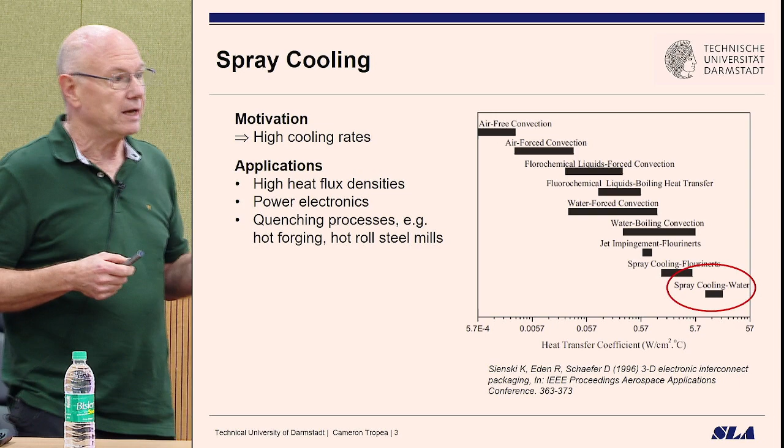This slide you've already seen at least once, maybe twice today, and it simply says that spray cooling, in this case with water, gives you extremely high heat flux densities - higher than anything else. I didn't put temperature on here also.

Now I have to figure out how this works - how do you get the pointer to work in this thing? Ah, okay, I think I have it. I got it, yeah, I understand - I first have to get my cursor off to the other side, then turn on this guy. Okay, good, I got it, yep, thank you.

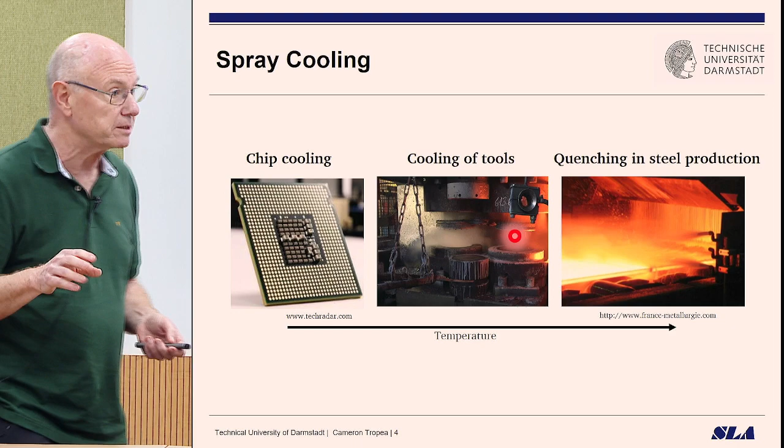So let's go. We have several applications, some you've heard about today: chip cooling, also quenching - hot rolled steel slabs and so on are spray cooled. One which we did a lot of work on is forging, hot forging: forging dies get hot, and you spray cool them in between individual castings. These applications typically involve very high heat flux densities and usually high temperatures. Now I'm going to show you an experiment - not because I want to tell you about what we do in our lab, but because this experiment gives you the information required to understand the physics.

There are two parts to this experiment. If you spray something to cool it, you have to know everything about the spray, and you have to know everything about the slab.

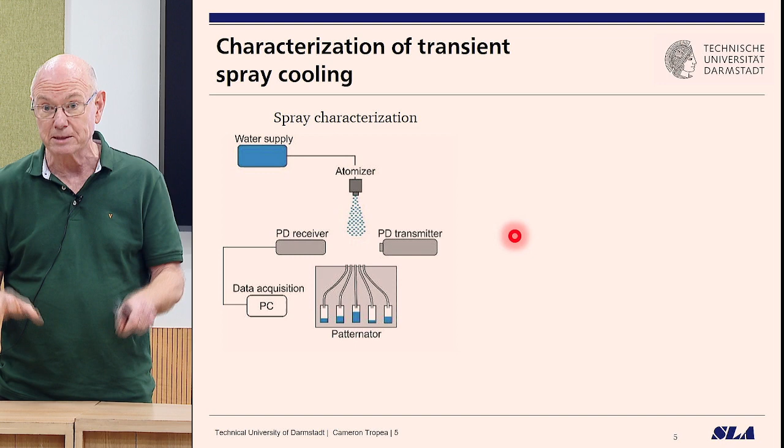So that's why we have two parts here. The first is the spray characterization. You have to know all about the spray, not just how much goes into the nozzle at what pressure. That's uninteresting. What's interesting is how much gets on the substrate: how big are the droplets, how fast are they, what angle do they go at, and what's the number density. Those are the four things you must know if you want to start looking at the physics.

So this is the type of thing you have to have. You have to measure velocity and size of droplets. You have to measure also the mass flux, with a patternator or something. And then that's for that particular nozzle.

Then you have to know something about your slab. If you have a big slab and you've heated it up, typically in the laboratory we make it adiabatic, so all the heat goes in one direction, a one-dimensional heat transfer problem. But you have to know everywhere on the plate what the temperature or heat flux is, not just the integral, because the number of droplets is different everywhere.

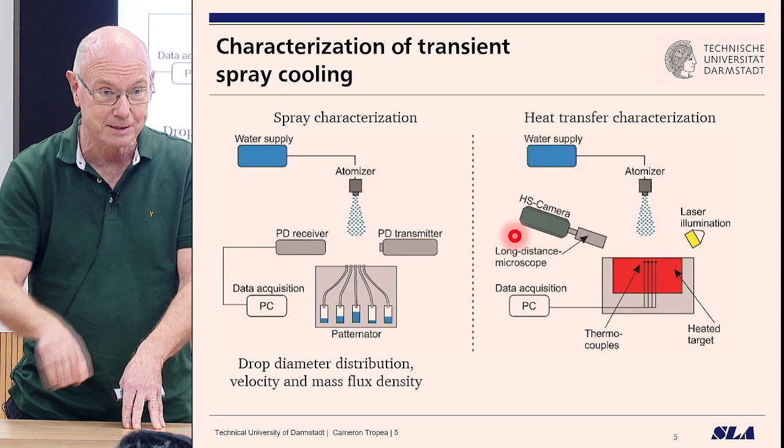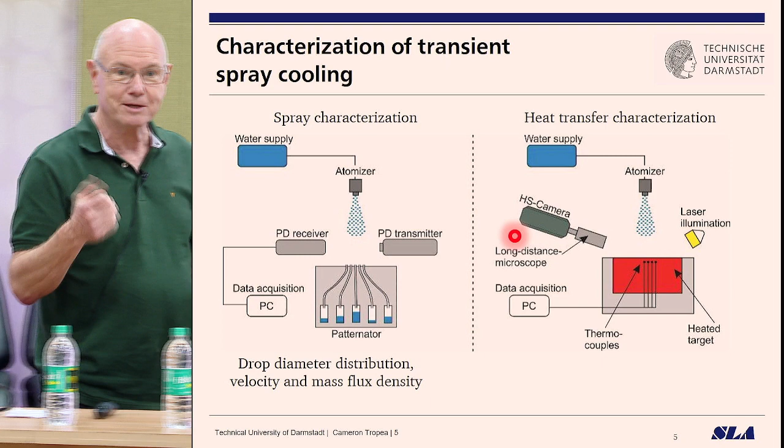So we do that, and then you have all the information to make physics-based models. It's a lot of explanation, but I think you understand what's going on. And if you want to run the experiment, then you have to come.

Now I have to do something. I need the other thing here. Just a minute, sorry about that. I have to take this guy off and put him here. So this is the way the experiment runs.

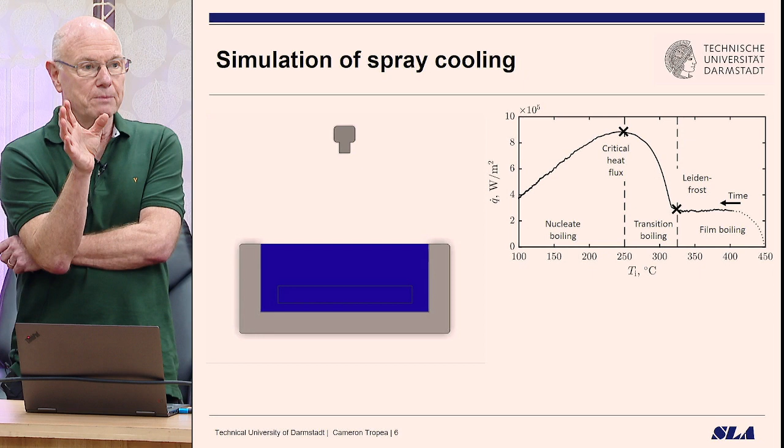You heat up the slab until it's a certain uniform temperature. Once it's uniform, you start the spray, and then you start monitoring where on the slab it's cooling down.

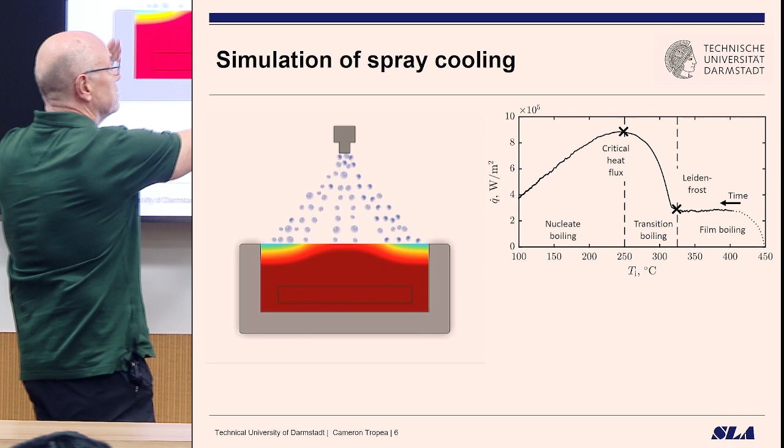Now you need the heat flux on the slab, and you do that with an inverse heat transfer problem. You know the temperature and the boundary conditions, so you solve the FEM for the entire slab and find out what the heat flux is at the surface. That's the inverse problem. But then you know everything, and you also know everything about the spray.

And then you need a fast camera with a big Questar long-distance microscope, so you can see exactly what's happening on the slab. We have to know, is it a pool? Is it single droplets? What's happening? So if we want to make a model, we have to understand that.

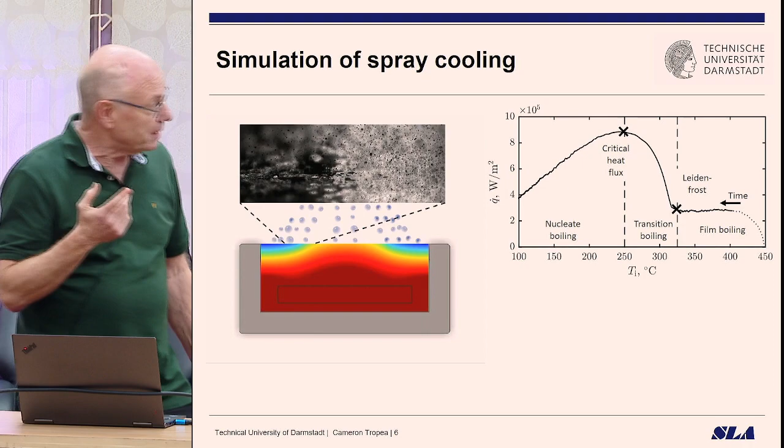This diagram here is a little bit funny. It's the typical boiling diagram. You see the temperature, and this is the heat flux. Time runs here. You start at some hot slab, it doesn't cool down much, and then the heat flux goes up tremendously, and it cools down, and then this is, of course, your critical point.

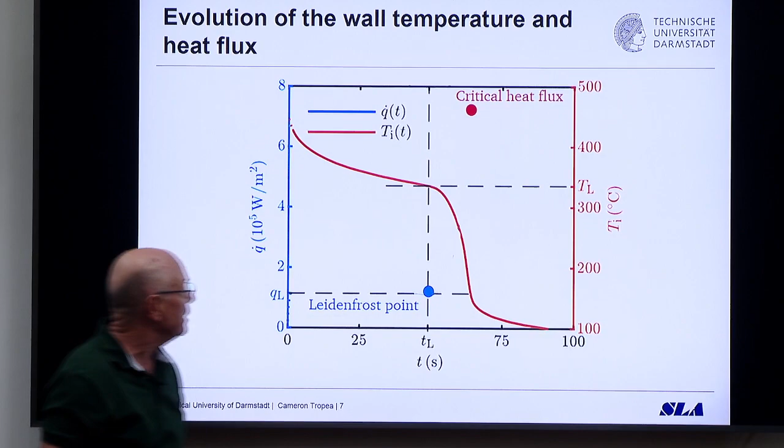I'm going to show that same boiling curve now in another way, in time. Here's the temperature in red. It doesn't cool down much, and suddenly it cools down a lot. And if we look at the heat flux, it's almost very low, and then you get transition boiling. So this is film boiling, transition boiling, and nucleate boiling.

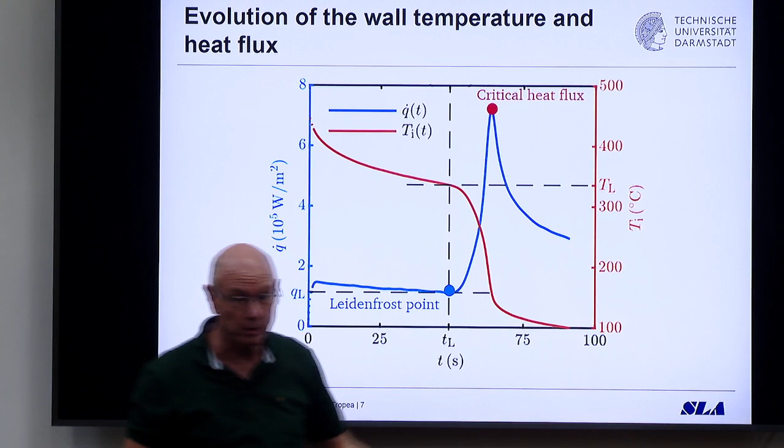So it's clear for the transient problem, we're going through different regions: film, transition, and nucleate boiling. And it's unlikely—somebody said it today, I think our first speaker said it's a dream to get one model that'll do everything. It's not going to happen because the physics are different each time. And the camera will show us what exactly the physics are.

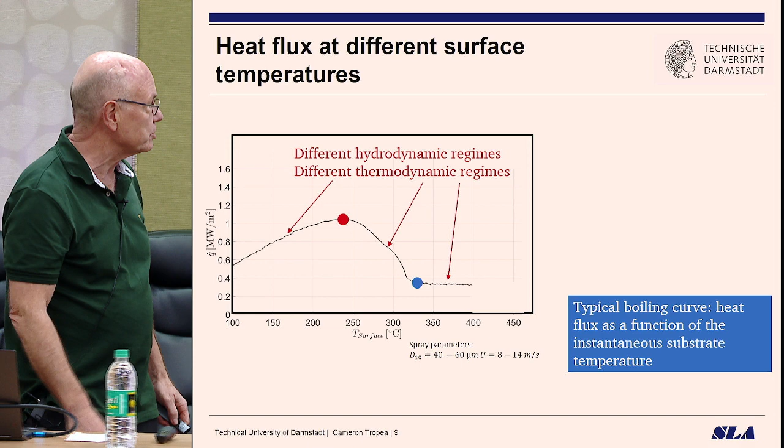So this is a typical boiling curve. Again, I showed in terms of temperature these different thermodynamic regimes. And you can see already here, depending on what temperature we start our slab at, the thing looks different.

Okay, so that tells you immediately there's a memory effect. Somehow the system knows what went on before. The spray doesn't know that, only the slab can know that. So it's very clear the slab and its thermodynamic properties, especially the effusivity, play a tremendous role in spray cooling. And if you don't capture that correctly, you're not going to be able to continue the problem. So that's a very simple deduction out of this picture.

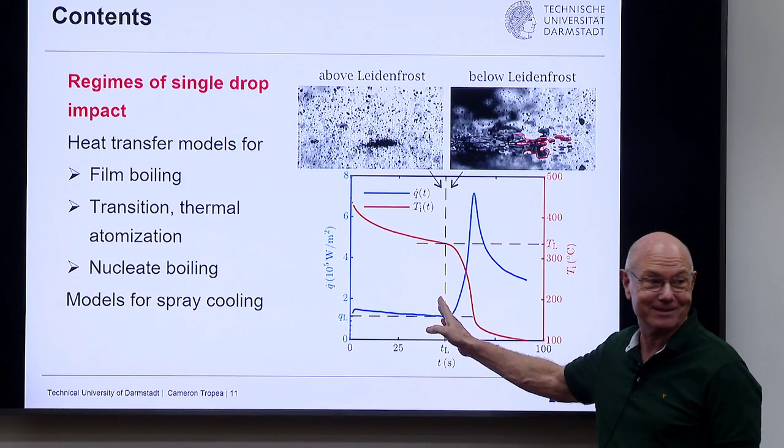Okay, so again, now we start looking at the camera. What's happening in these different regimes? We have this regime here where really nothing happens. The temperature doesn't change much, the heat flux is low, and we don't see any puddles or anything. This is above Leidenfrost, the film boiling. It's like at home in the kitchen on the hot stove, and the drop just bounces off and runs around. So there's a vapor layer there, and very little heat transfer.

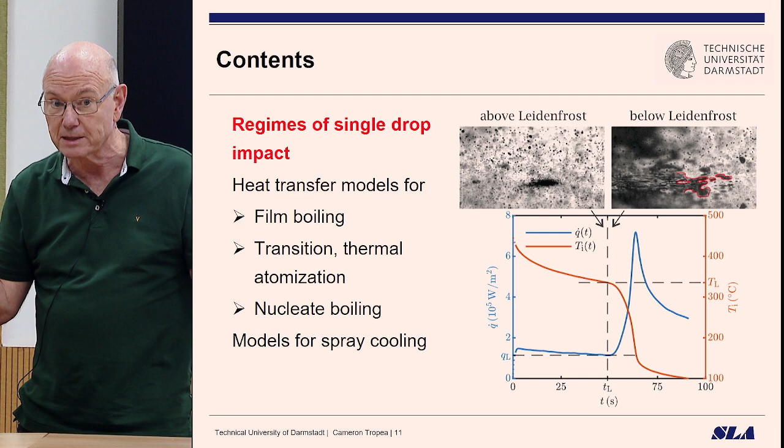And then clearly, when we get into this region, in transition and nucleate boiling, then we see puddles, and we see evaporation. We have the latent heat of evaporation using it. So now we have to say, basically, we wrote a book about the hydrodynamics of drop impact. We understood that. But now we have this thermodynamics. And the question is, does the thermodynamics change the hydrodynamics?

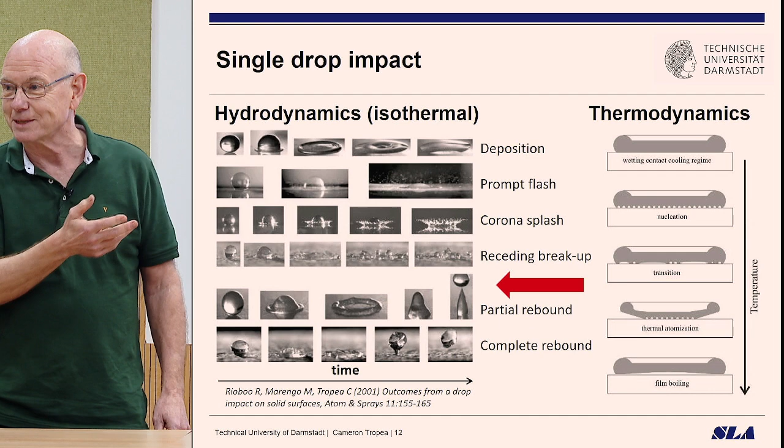And it does, of course. And that's what's new, that you have to capture in your models now. You have to capture how the thermodynamics change the hydrodynamics. And of course, out of that, you get the heat transfer.

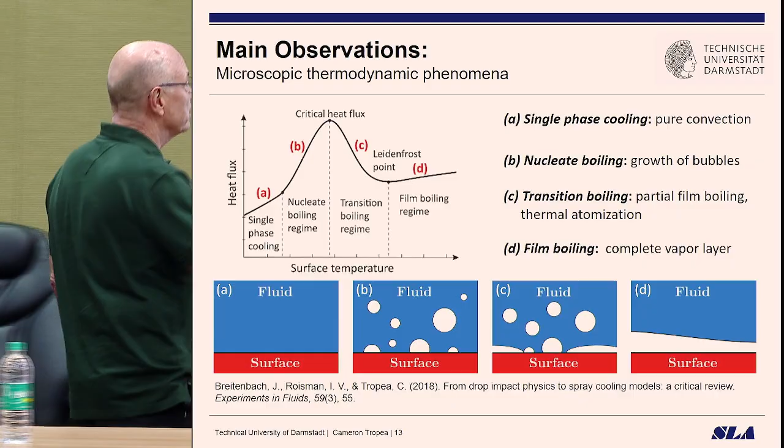Okay, so now this is like a small tutorial, a four-part tutorial. We're going to look basically phenomenologically at these four sections: single-phase cooling, nucleate, transition, and film. And we can say this is actually a film from Peter Stephan, this one. And the film I wanted to show for two reasons.

One reason is it's a conjugate heat transfer problem. You have to capture the heat in the substrate, that's this part. You have to capture that, otherwise you don't know what's going on. And the other thing that I wanted to show you is that you have viscous boundary layers and you have thermal boundary layers. So this is, the blue is fluid and the red is substrate. And you have a viscous boundary layer, you have a thermal boundary layer, and then you also have a thermal boundary layer in the wall.

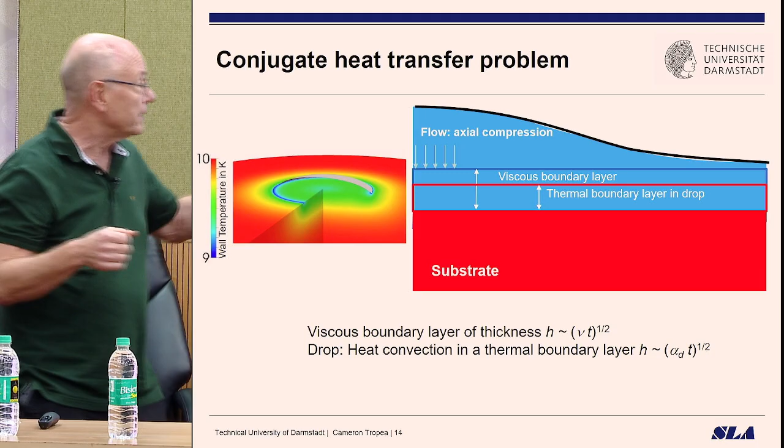So if we're going to now move from phenomenological to analytic, we have to describe these boundary layers. And these are diffusion boundary layers, so it's square root T. It's always square root T. It's all diffusion. And so we can write these out, and this will be part of our analytic solutions.

Okay, so let's look. Here's convection. There's a drop coming down. It sort of spreads out and just relaxes. And with time, it will evaporate because underneath is hot and above is not so hot, and it evaporates. Takes a long time. Heat flux is low.

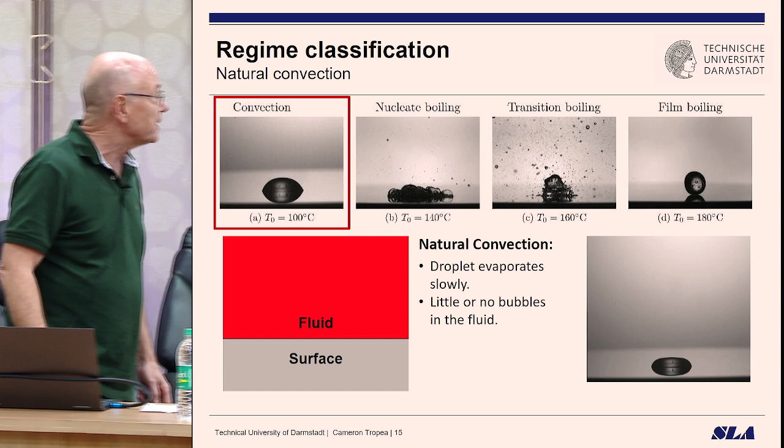Then we have nucleate boiling. So it goes, and it's so hot that it starts to boil, and bubbles come. And these bubbles, they go up, and then they burst, and you get little droplets coming off. But notice one thing I will show you later: the footprint stays constant. Take a look, it's about the same area. So if we're going to have to do something about heat flux, it's per area, so the area stays roughly constant. We're going to make that assumption.

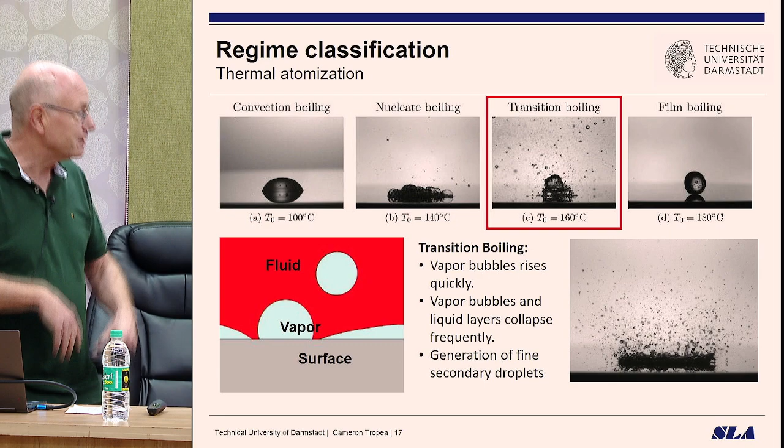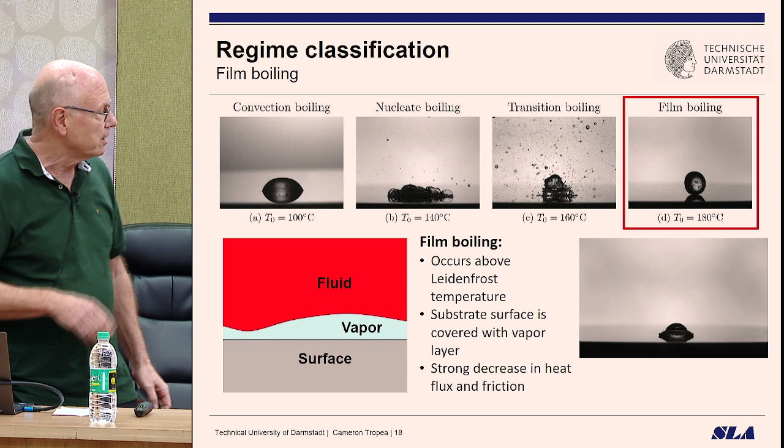Okay, now we'll go to transition boiling. And now what happens is you get contact, you get immediately boiling, all these little droplets or bubbles bursting, and then the whole thing lifts off because you get a vapor layer then. And so that's the trend. That only takes a short time in the spray cooling when you're cooling down. And here's what happens in your kitchen: you have a vapor layer, it never makes contact, the liquid, with the droplet.

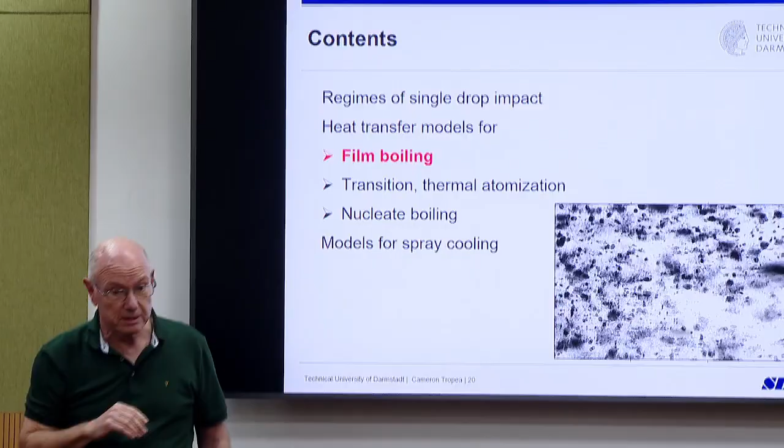So this is the contents of my lecture. Realizing I've already used 15 minutes, I have three sections: film, transition, and nucleate. So let's start with the film boiling. Remember, that's in time we went film boiling, transition, nucleate. In temperature, of course, it goes the other way. But let's take a look at the film boiling.

So we have the situation that these things, they have a vapor layer and they just bounce off. So do they take any heat away? Let's take a look at how much heat they take away in that case. And you can't avoid this.

If you're cooling down from high temperatures, it's not efficient, but you can't avoid it. So let's take a look.

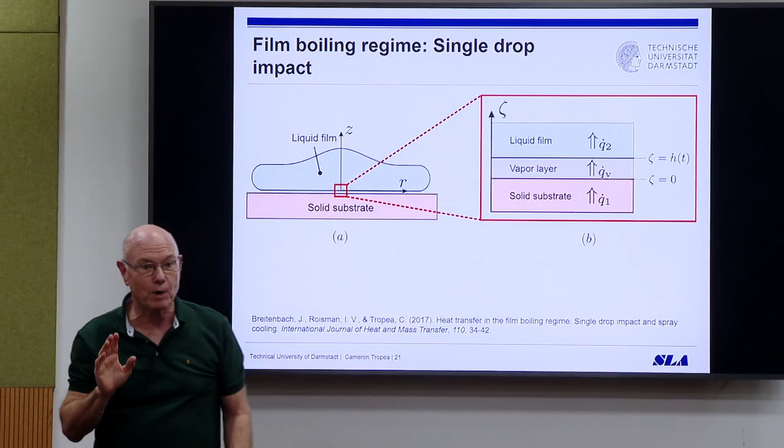You get a vapor layer that is some hundreds of nanometers, and the droplet is some millimeters, so it's basically a 1D problem. You don't worry about the end effects - that's a million times larger. So we make it into this solid, vapor, and liquid film, and now we simply look at the boundary conditions and solve the differential equations. They're all ODEs, one-dimensional heat transfer.

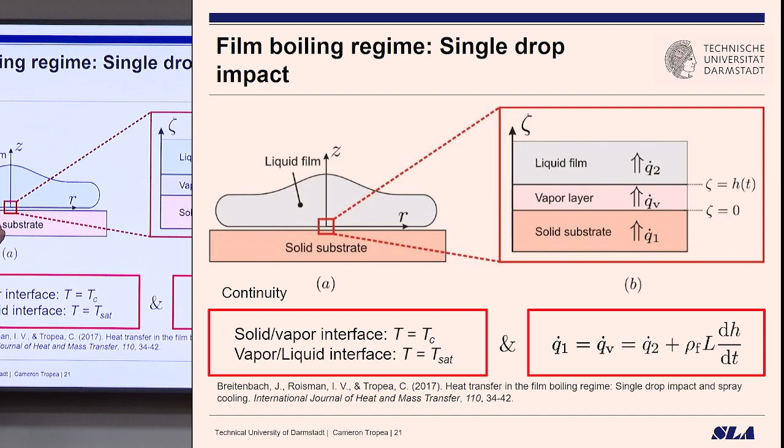We have some boundary conditions at the solid-vapor interface: the contact temperature, and the saturation temperature at the vapor-liquid interface because it's evaporating. Then we know the heat flux through here plus your latent heat of vaporization, and this is the change of height of your vapor layer. This could be heat transfer 101 in an undergraduate class.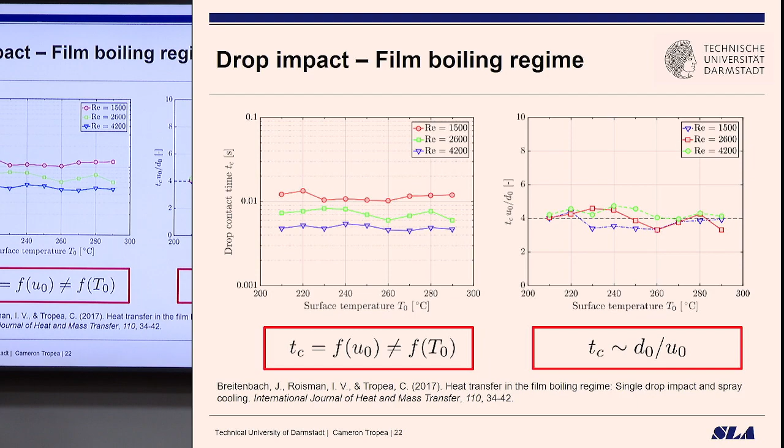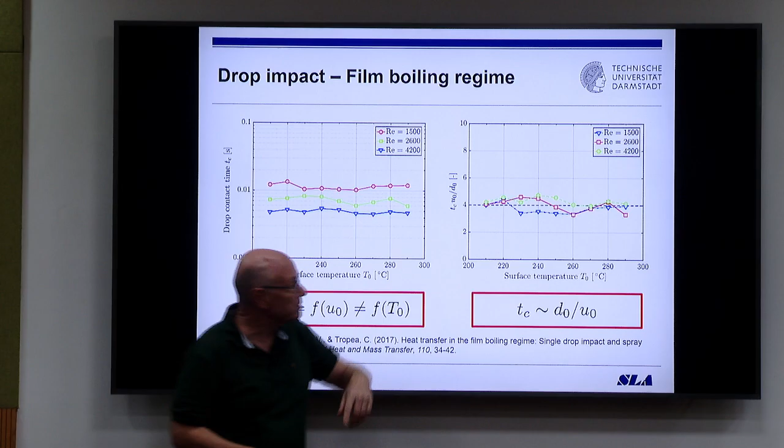Then we look and say, okay, if we do that at different Reynolds numbers - this is the experiment I explained to you - we see that if you non-dimensionalize the contact time, the time it takes to go away from the surface, it's not Reynolds number dependent. That means it doesn't matter what velocity you go at, non-dimensionally it's all the same. You get the same contact time, the non-dimensional contact time.

You have these thermal boundary layers, and here's the effusivity of your substrate, the wall, which you have to put in because it determines how much heat can come out of the wall, how fast. That's exactly what effusivity is, and it's a material property - you don't have to measure that, you know it. So you've got this in the solid, you've got it in the liquid, and basically you have 3 ODEs which you solve numerically to get your solution.

So we can actually solve for every single droplet that comes down. It spends D divided by U time there, and comes back up. We only take the time it's spreading out, because when it's spreading out, the temperature difference is highest and the vapor layer is lowest. When it comes back again, it doesn't take much heat.

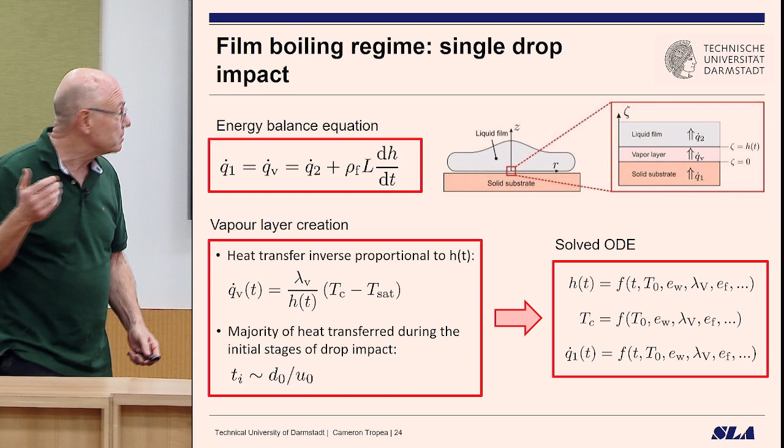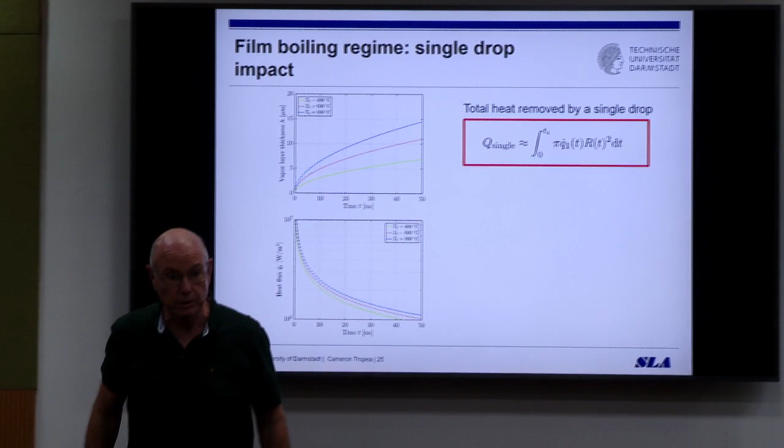So we can compute the vapor layer thickness and the heat flux as a function of time, in milliseconds. The heat taken away from a single droplet is the time it takes to retract - here's the radius squared and the heat flux, and pi, and then you integrate it. And you can do that - we have the solution.

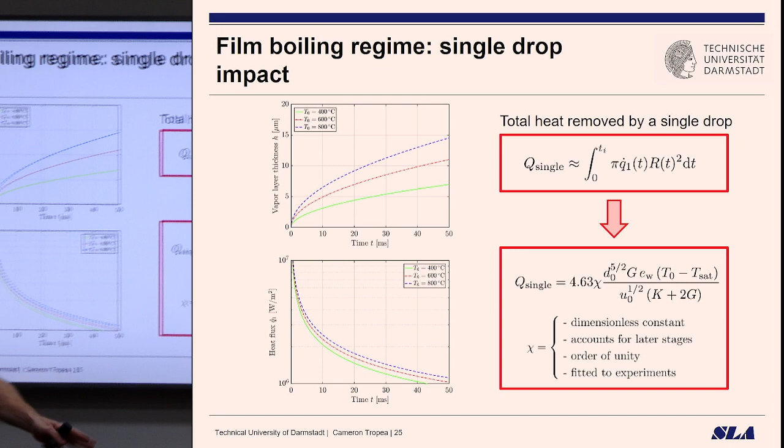There's the solution, and chi is the only adjustable constant. That accounts for the fact that there are some end effects out there that we didn't take care of - it's basically 1, should be a little bit, basically 1. So this tells you for every drop that goes down, how much heat comes out.

So if you knew the number flux, the size of the droplets, and the velocity, you're finished, because it goes so fast it's just superposition - you saw the film I showed you. If you want an H, that's per area per time, you have to say how much of the area you've used out of the total area with the number of droplets. If you only put one droplet on a big area, you're only using that much of the total area - you have to scale your H. But you can get an H out of this, and this is just saying you can do superposition in this case.

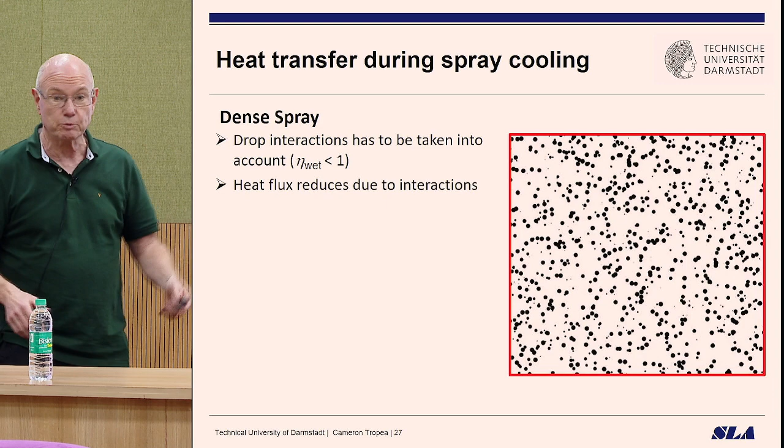Then you might say, well, if I had not just a sparse spray but a very dense spray, they might interact with one another. It's true, there's a probability - if you take randomness, then it's a Poisson distribution. At higher densities, you can get some drop-drop interaction and account for that. What I'm going to show here are different experiments from people - I think one was Germany and somewhere else - and you can see completely different sizes of droplets and velocities in the spray.

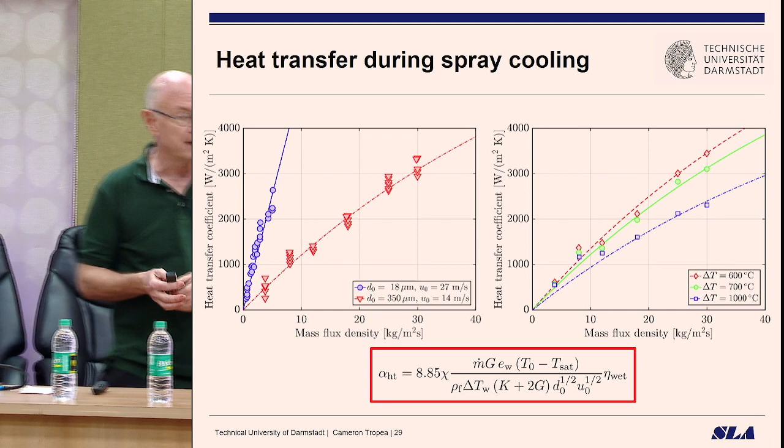We don't know how it was distributed in the spray, they just measured some means. The dotted lines are our analytic solution. So I hope I've convinced you that we can move away from empirical correlations and do this analytically. That was above Leidenfrost, that was film boiling.

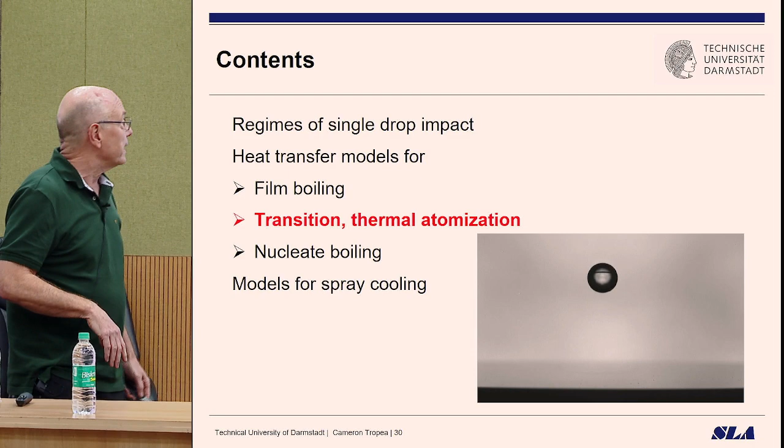Let's go now to section two, transition boiling. So just to repeat, it does make contact, and you get bubble bursting, so you get a bunch of little droplets, but then these larger droplets go into basically film boiling. Again, we can hope that superposition will be okay. The droplet doesn't stay long there, and when the next one comes, it's dry again, so we start again from where we were.

And we can look at that situation. So we get lots of small droplets and then these larger filaments and ligaments that come up. We call this the Marilyn Monroe effect. And the question is why?

Because we want to now model this. You can see how these things are coming up. Why would they come up and go away from the surface? Well, we have to look back to Marilyn Monroe.

I actually learned just last month that was not filmed in New York because it was too noisy or something—there were too many other things going on. They filmed it in Los Angeles, although it was supposed to be over a New York subway station. But anyways, I just learned that as a side note. Okay, anyways, but it's clearly an updraft.

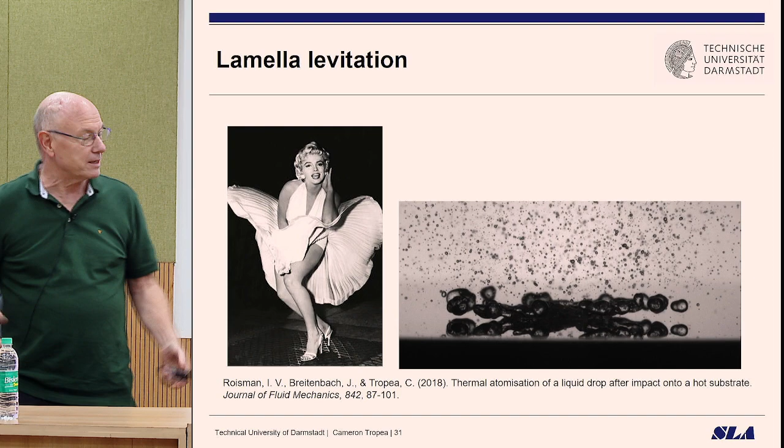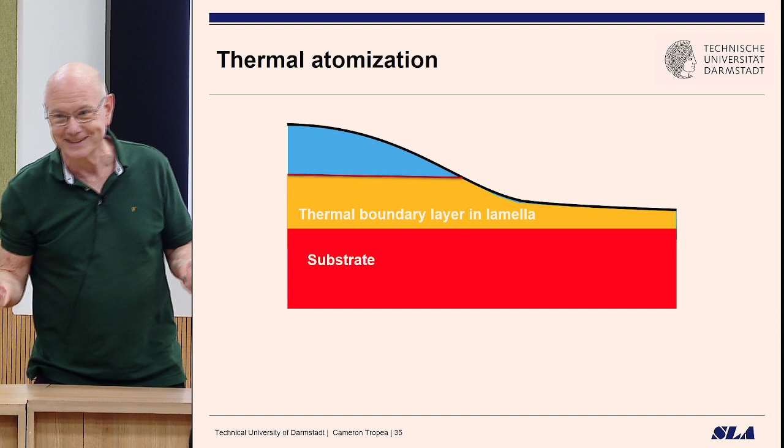So what have we got? We have this hot substrate, we have this droplet—this is all droplet, but it's not all blue. Why? Because it's heated up a little bit. Remember the surface tension: if you increase the temperature, the surface tension goes down. That's why you wash your clothes in warm water. So that means the surface tension here is high, and the surface tension here is low. And that means...

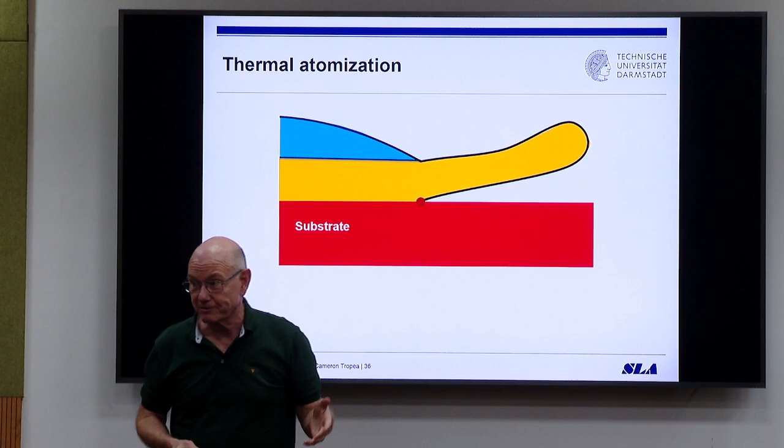It's pulling—we have it pulling up. At the same time, we're creating vapor here, and that's the updraft. That's the Marilyn Monroe updraft. So you can see what's happening.

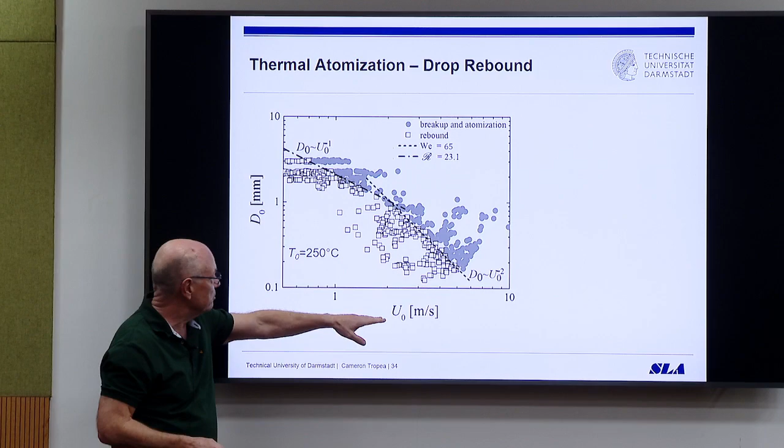So now the question is, can we model that? I think I can go backwards because I skipped over a slide. This is what we're seeing from above—you can see the little droplets sometimes, and then the larger ligaments. And so this is now velocity and diameter. Normally I don't like to use units in graphs, but let's just look at that for now. You can see here we have the rebound, and here we have the breakup and atomization, the transition—we call it thermal atomization.

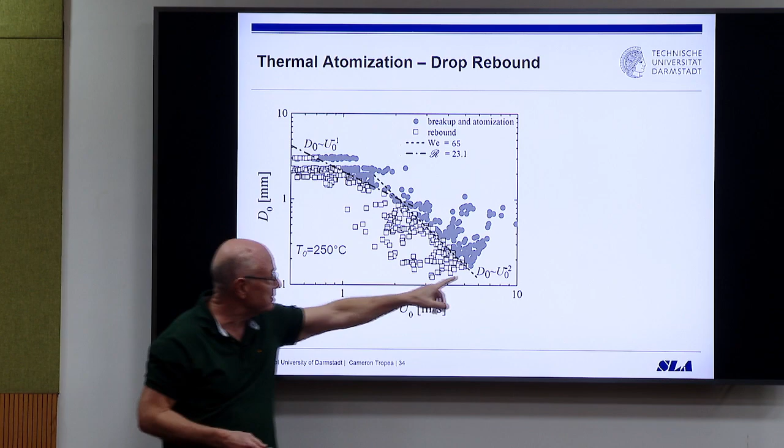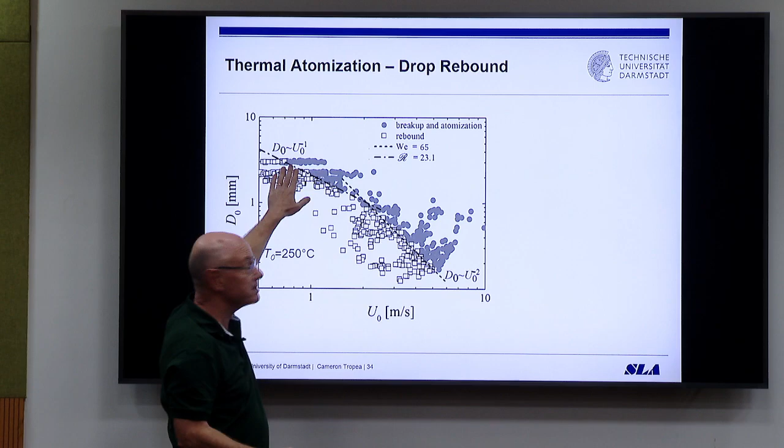Well, it's pretty clear, there's a clear dividing line. This dividing line is d proportional to u squared, and the other is d proportional to u. And that already tells us: d proportional to u squared, that's Weber number. Weber number is rho u d squared—rho d u squared divided by sigma. So this is clearly a Weber number effect with surface tension. That one is not yet described; we described it some years ago with new dimensionless numbers, and the other is Weber number.

Okay, so we saw that already. So we have this contact time—how long does it take for the droplet to depart from the wall? This has been superseded. We have a new publication from last year that shows the model now, the analytic model for this. But all I'm going to show you is that we're able now to predict very well our experiments in terms of contact time—how long does it take for the drop to retract from the surface?

And here again, a nomogram in these new numbers: when do you get transition boiling or transition, when do you get deposition, and when do you get atomization?

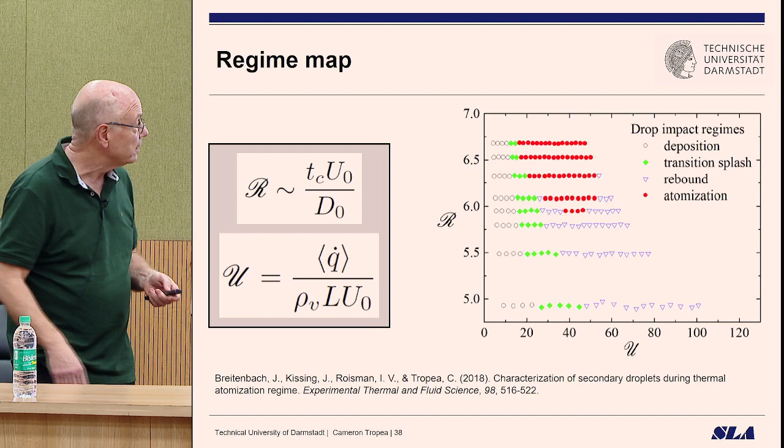Okay, and so this is a bit from this newer piece of work, 2018, where we basically ask: can we also compute the heat removed by one droplet? And the answer is yes, though it's a little more difficult than the analytic part. I'll stay phenomenological here, but basically it uses something like percolation theory—how many bubbles have to appear before you get a breakup of the total mass.

Okay, and these are some additional remarks about that. Now I'm going to move to the nucleate boiling. Remember, I told you the footprint stayed the same because we need the area, since Q is per area.

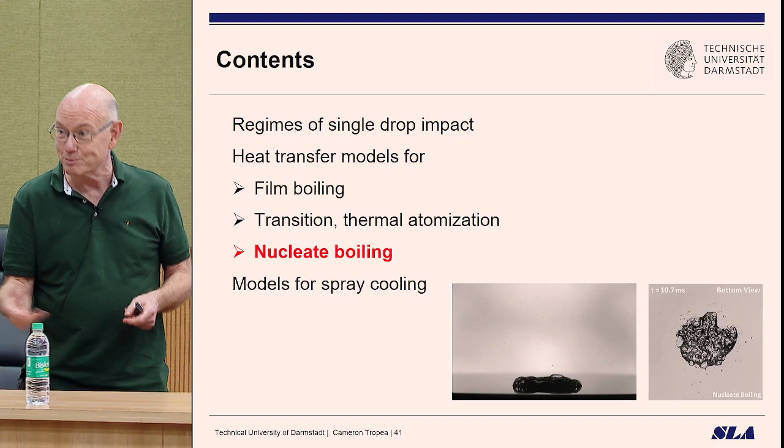We're going to assume this thing comes down, spreads out to some maximum, retracts a little, and stays there. We know that number - that's the hydrodynamic part. Let's look at it from the side and from the top.

This is now with the infrared camera from below. You notice at the edges you get completely different colors - this is temperature, and this is heat flux. Maybe I'll do that once again. This is a pet project of Peter Stephan, one of our thermodynamics professors in Darmstadt.

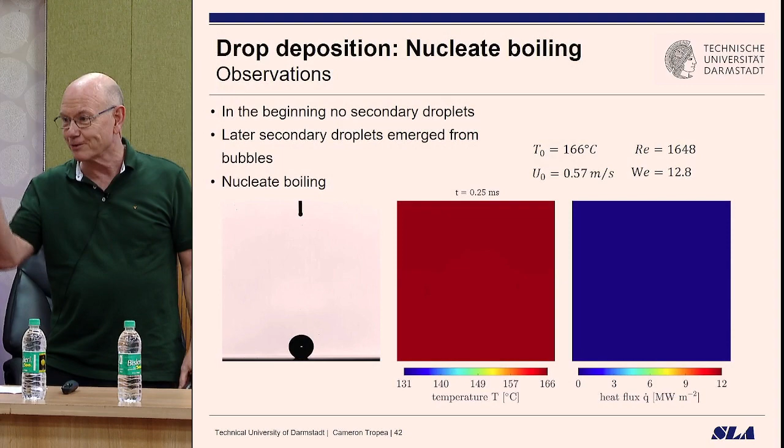Basically, it's saying that in nucleate boiling, a lot happens on the edges. He uses the word microlayer, though I'm not so happy with that. But you can see it's happening on the edges - why? Because it's a very thin layer there, at the wetting front, and the heat otherwise goes into sensible heating of the bulk.

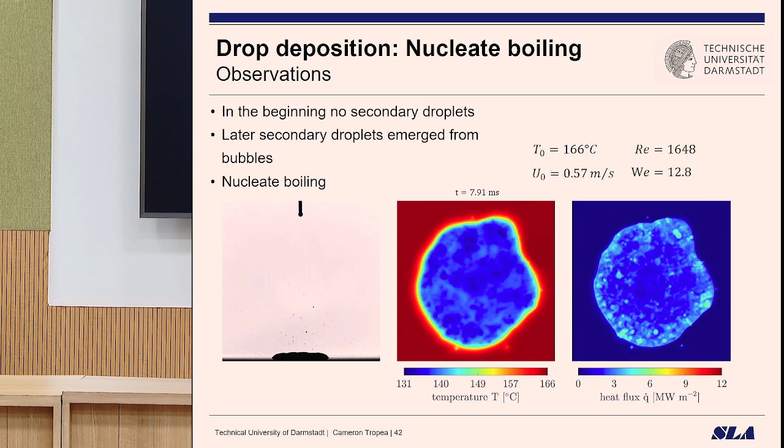The conclusion Peter Stephan makes is: if you want to evaporate faster, make a longer contact line. How do you make a longer contact line? Make it rough. Then you have a longer area that is thin and evaporates quickly. And it seems to work.

We wanted to compute the heat flux from a single droplet, and these are just some stills from that last diagram. This is now the measured contact time, all with that experimental rig I showed you.

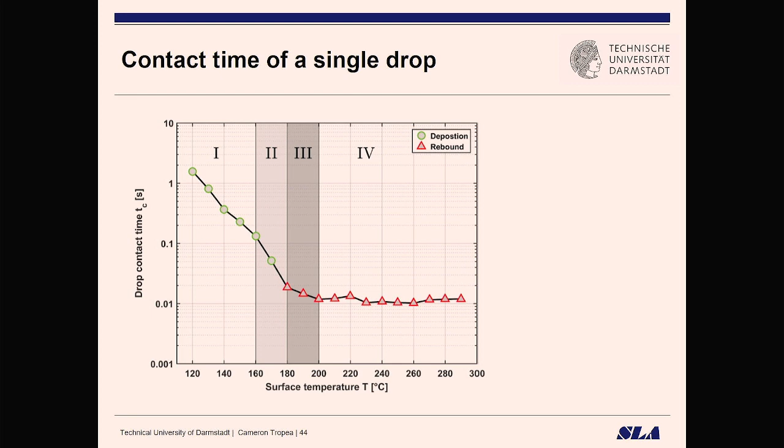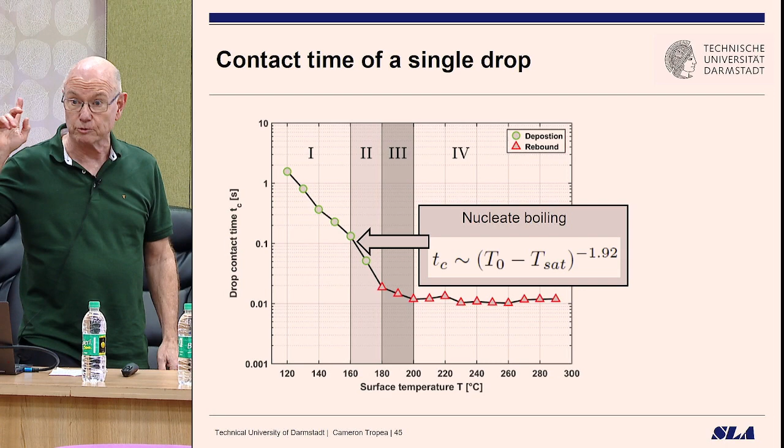This is the surface temperature, and this is, of course, the film boiling regime. That was the transition boiling, and here we're in the nucleate boiling. Depending on the temperature, we have different contact times - it goes almost with -2 with the temperature. I'll come back to that, because that's what we also get in the analytic solution, -2, and it agrees very well with this experimental solution.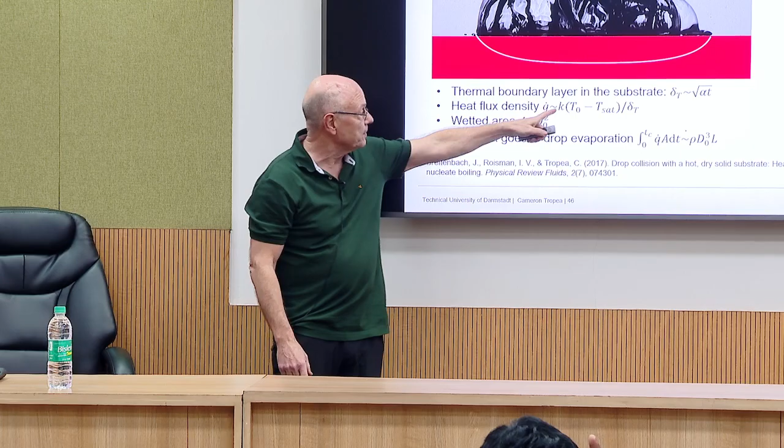Now that we're going to keep constant: the thermal boundary layer in the substrate is diffusion dominated. The heat flux density - this is your thermal conductivity, and then we have wetted area is some d0 squared. It's proportional to - but we know the proportionality.

That's the hydrodynamics, and then we'll simply say: what goes out, over the time it's there - that's the contact time until it's all evaporated - is the heat flux times the area over the time integral, and that's going to be somehow related to...

And now here comes the remarkable, completely non-intuitive result: if you have nucleate boiling, a droplet goes down, bubbles away and evaporates, then you know how much heat was taken away, because it's exactly the mass times the latent heat of evaporation. It doesn't matter how many drops you have, it all goes away. So you've got this very clear, basically an equality sign.

There's one factor missing, but it's basically the volume of the droplet times the latent heat of evaporation must be what you took away in that time. So it doesn't matter how fast it went down, or how big it was - you know how much heat was taken away, because everything evaporates.

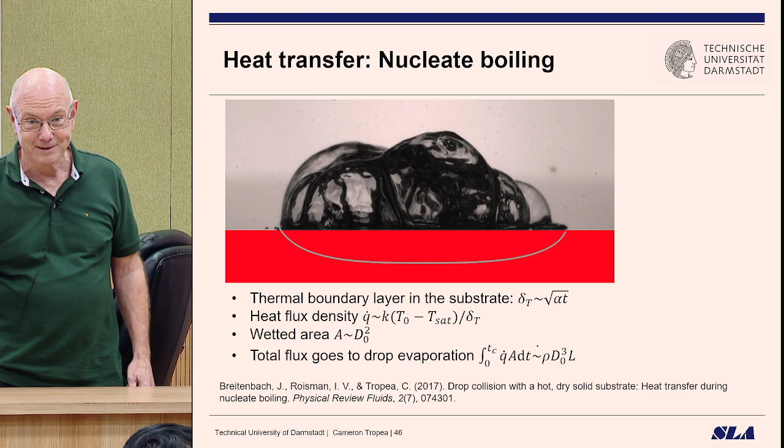What we want to know is that - and why do we want to know that? Because that tells us the rate at which it was taken away. We know how much was taken away; we want the rate at which it was taken away. So we want to solve for Q dot.

So here's the contact time - I've just, you can solve for that. And again, you have the effusivity of the wall, because if the wall doesn't supply enough heat, it takes longer. So it has to deliver heat, and that's the effusivity.

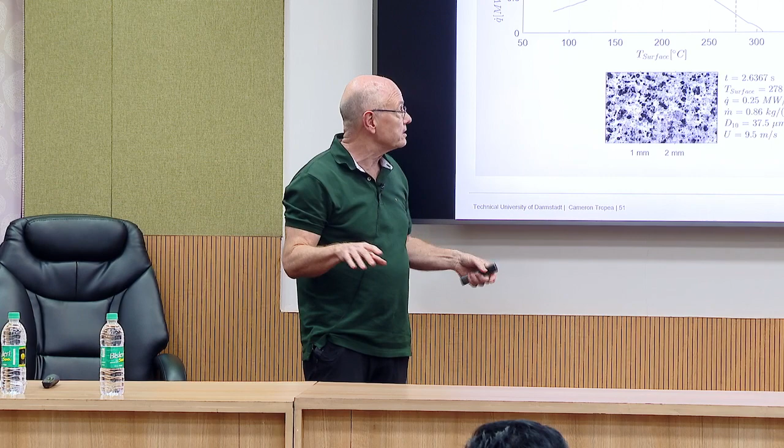Okay, so we have these three sections. We have heat transfer rates for each of them. Now what we want to do is go and say, in transient spray cooling, can we compute how much heat is taken away, how fast?

So clearly you have to take whatever substrate you have. It could be a flat plate, but it could be a cylinder or something more complex. And then you have to work out from this spray what is the mass flux on this curved surface. This is what I'm doing with Nilo, and he's ready to quit, I think. But it's engineering, not science. It's engineering, but it's not simple.

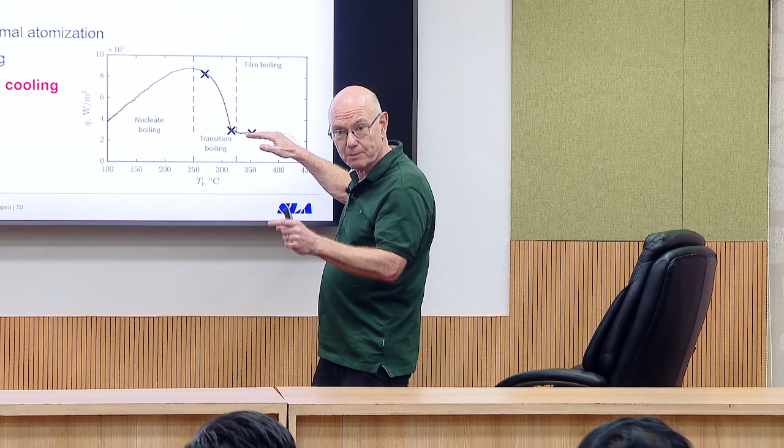And then you have to do this at every local area. You have to say, okay, I know my substrate temperature because I'm marching in time. And then I have to say what temperature it has - is it in this region, or this region, or this region? And then I have to invoke the model which is appropriate and solve it. That's basically where we are now. Nobody's really done that up to now. That's what we're trying to do here in Madras, in Chennai.

But let's look once again at what's happening. So this is a film - you see the temperature of the substrate is this dashed line, and if we're patient enough, that will move. This is the film boiling. You see, nothing stays there - it just bounces away. That's the superposition we talked about.

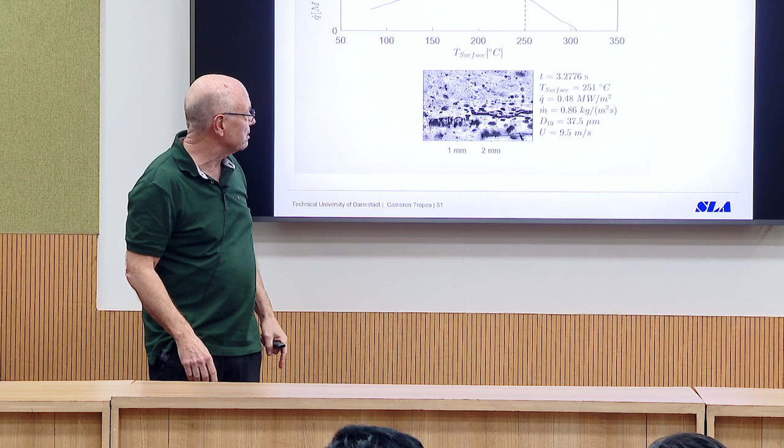Now you see the temperature changed, and now we're in this region. So that was the Leidenfrost point, and we're now getting some first little bubbles and puddles staying there. But they're not interacting very much. I can tell you, you can have tremendously high mass flow rates in a nozzle. Let's say we were doing forging, we were doing like 25, 30 kilograms per minute - that's high - and there was almost no drop-drop interaction on the wall.

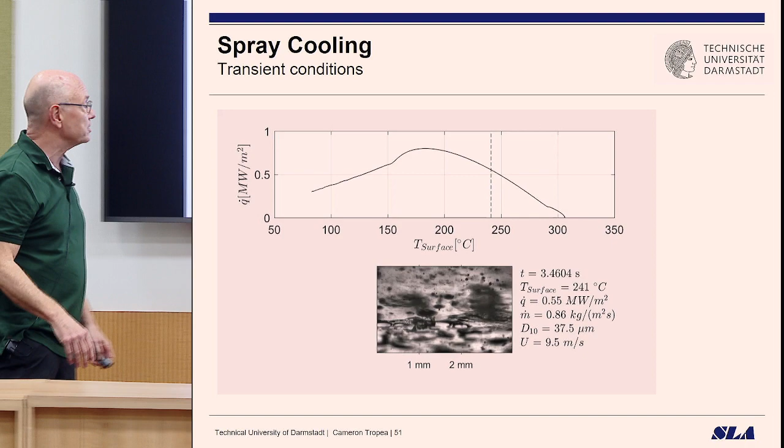I mean, if you start getting a pool, that's different - that's pool boiling, that's different. But if you're just staying with the spray boiling - and several people said this morning, the key is now to monitor and adjust your spray so you always keep in the spray boiling or spray cooling region. So here you can see the temperature is moving down, and you start getting more and more, and eventually you're out of the spray and into pool boiling.

Okay, so I tried to put these together here. You can see we've tried to capture just these edges - what is happening physically between here and here - and that's what you see in those fast movies. So the rest is actually not so interesting for you.

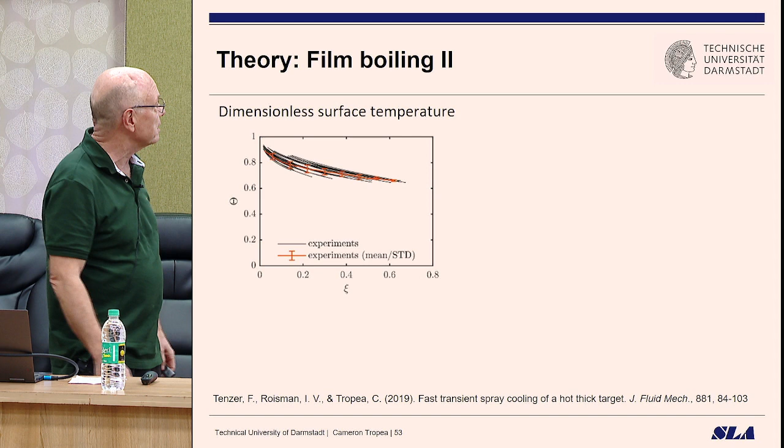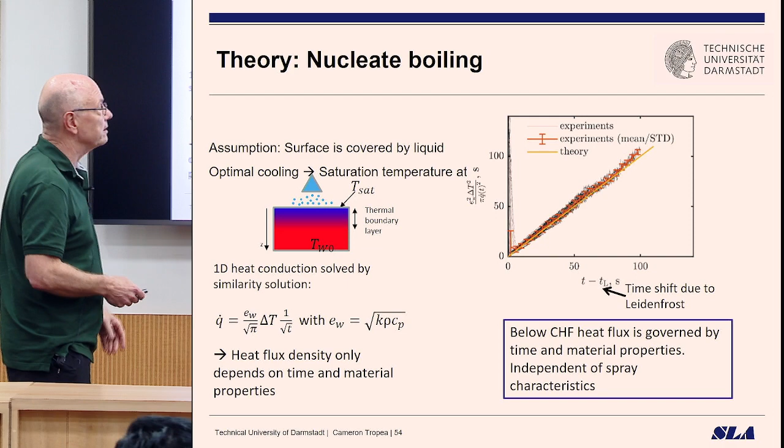And so again, this is the nucleate boiling. There are some assumptions we make, but if you do that, you also get good agreement between theory and experiments. So we feel we have validated the theories, and I repeat, this is what we've done.

Now we have to decide, as we're cooling down in time - we start at the high temperature, that's film boiling, and as it goes down, it goes into transition boiling, and then into nucleate boiling - the question is when? Is it a temperature-dependent thing, or a time-dependent thing? We have to know when to switch our model in our code.

And the most critical part is actually this Leidenfrost point, the point of minimum heat transfer. We have to know when we've reached that point. We can do an experiment, of course, and see it, but we want to be able to predict it, not do the experiment.

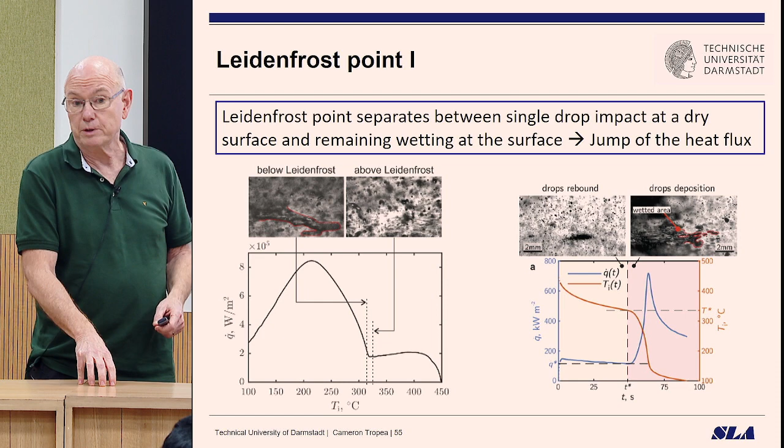So how do we predict it? We've actually made some progress on that. Going from the transition to the nucleate boiling is not so difficult. We know the contact time for transition, we know the contact time for nucleate, and as soon as the contact time for transitional boiling reaches what we'd normally get for nucleate boiling, we know it's transitioned.

But the Leidenfrost point, that temperature, is a little more difficult. I'd like to convince you this is different from what you'd normally read in articles. Most articles give you empirical correlations and some temperature, but they're of no use to you if you have a different system.

What we've done here is the following. For the Leidenfrost point, we ran this experiment and could see the minimum point of Q. We measured it, and then looked at the dependence of that temperature on spray parameters. For instance, we changed the mass flow rate in our nozzle, we changed the Weber number, we changed the diameter of the drops, the mean diameter, and we changed the velocity of the drops hitting the substrate.

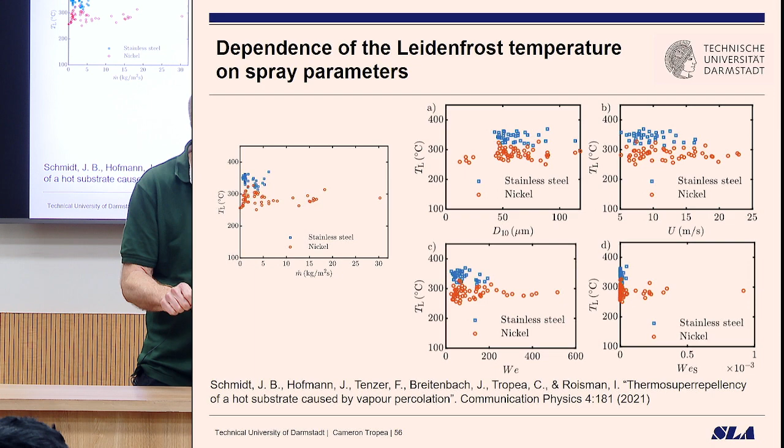But take a look: depending on the substrate, whether it was steel or nickel, there was always a clear difference. That goes back to that memory effect I was talking about. In the end, when it goes from that physical bouncing to little puddles, that depends on how much heat the substrate has and how fast the substrate can deliver that heat to the liquid. So it's actually a material property of the substrate that determines the Leidenfrost temperature, none of the spray parameters. That's what was not recognized for a long time in the literature.

We have a new result, the one I told you about, that gives very exact expressions for what that Leidenfrost point is. So that closes the story. Now, if you know your substrate, you have to compute FEM in the substrate, and if you know your spray parameters, you can compute basically how much heat you take out in one pass. I'll skip these few slides, and that's exactly what we're doing here at IIT Madras.

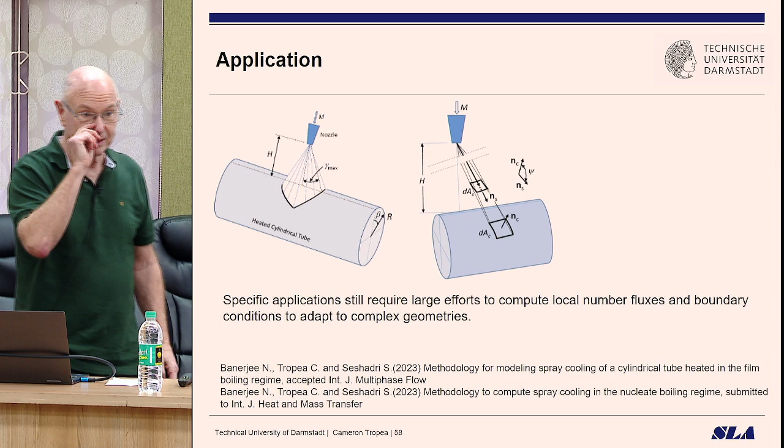Now we're trying something unusual: cooling down a cylindrical tube heat exchanger, and we have to work out the spray parameters on some elemental area of the tube. We compute the tube, and then we might have more than one spray and compute as we go. This is for some organic Rankine cycle system in applied mechanics.

Anyway, that's the end of the story. I told you I'm not going to give you any thermal management system solutions. What I tried to tell you here was the physics behind spray cooling, and that's where we are right now. We haven't yet applied it to total systems—that's what we're trying to do. Thank you very much for your attention.

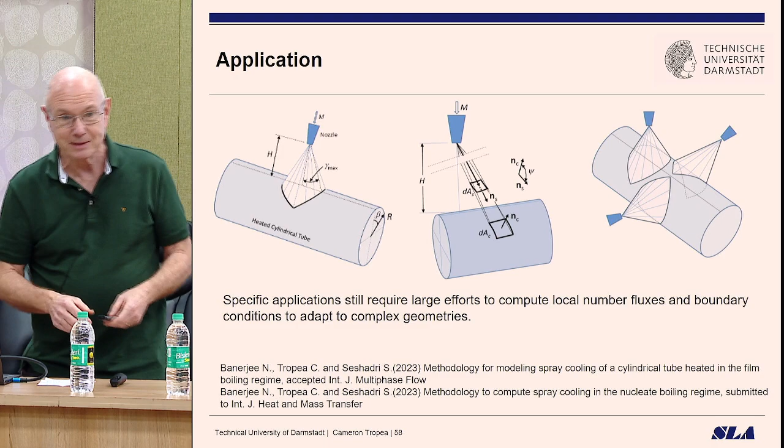Oh, I forgot to show you the ten slides of literature. In case you're interested, it's a good literature survey, so I think we can get it distributed somehow. There are quite a few slides of literature.

Takes time to warm up. Yeah, we'll start here. Okay, and then this fellow in the green shirt.